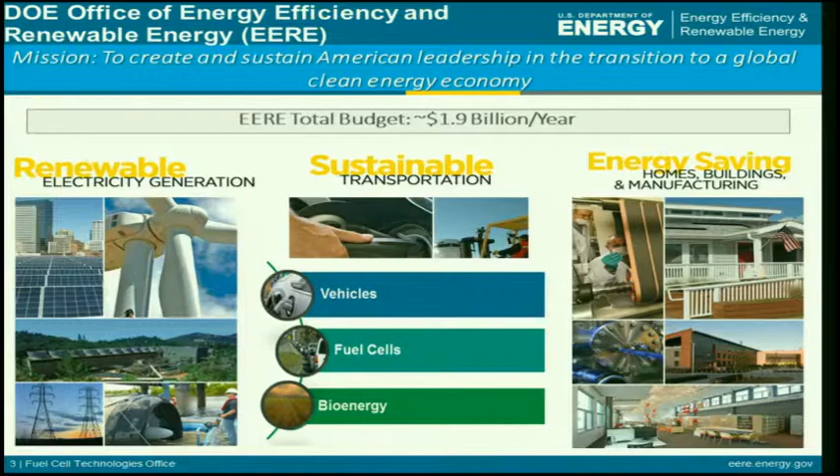And here there are three main areas: vehicle technologies, fuel cells, and biofuels. So what I'd like to do is cover the specific example of fuel cells in my area. This is an area that's actually not that well known compared to the other technologies.

I think most people are familiar with fuel cells. You can use a number of different fuels and basically convert the energy content in the fuel directly to electricity. There's no combustion, much more efficient—you don't waste a lot of that fuel as heat. Electrochemical reactions, they're modular and scalable, so they can be small enough to power your cell phone or laptop, cover transportation, and large enough to cover multi-megawatt stationary power generation. When you use hydrogen, obviously there are no emissions other than water and some electricity and heat. And as my NASA colleagues will tell you, the astronauts can actually drink the water coming from the fuel cells.

In terms of criteria pollutants, not just greenhouse gas emissions, there are benefits. One interesting statistic is that asthma rates have actually doubled in the last 30 years, so from a criteria pollutants perspective as well, electrification does make sense. And then from a resiliency or stationary power generation perspective, hydrogen can be used to enable intermittent renewables for energy storage. One other fact: in 2012 alone, climate and weather-related events cost us more than $100 billion. So grid resiliency is a key goal.

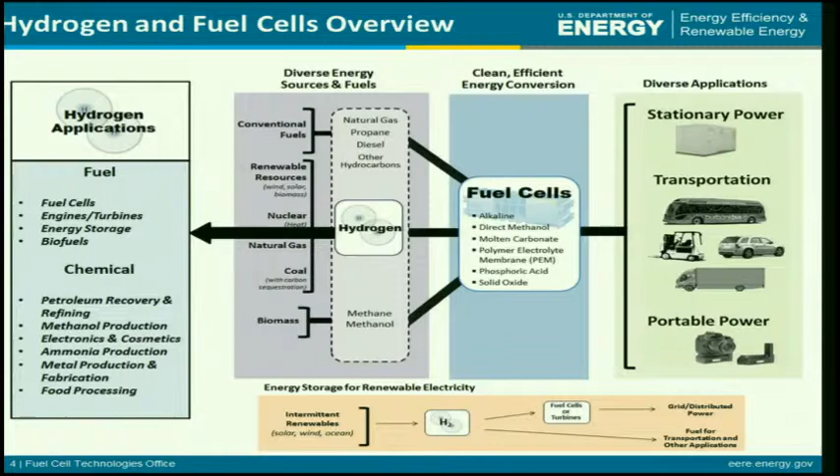And then there are a number of other applications for hydrogen—ammonia production, petroleum refining—so it's not just fuels for automotive applications. This is actually a very exciting time for fuel cells. I'd like to give you a quick snapshot.

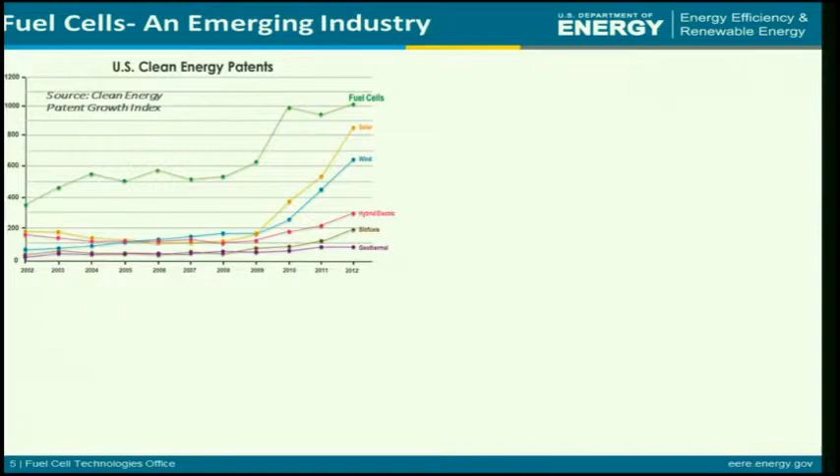How many of you have heard of the Clean Energy Patent Growth Index? You can Google it, but it tracks the number of patents issued in the US in the clean energy sector. What's very interesting and surprising for a lot of people is that fuel cells are really at the top of the list—1,000 patents granted in the US, 3 years in a row, essentially, for fuel cells. So this really represents the level of investment and the interest seen by industry in this emerging technology area. It is an exciting time.

We've seen consistent market growth, starting to get commercial—35,000 fuel cells were shipped last year. You can see steady 30% growth year over year. And the market is huge—again, many different applications: transportation, stationary, portable, well over $100 billion.

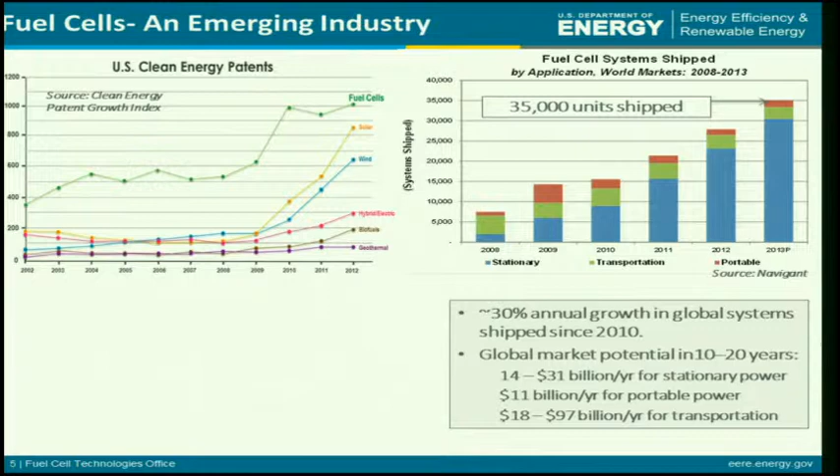And then also very exciting has been the recent announcements by car companies such as Toyota, Honda. Hyundai just started leasing their first commercial scale vehicle in California, and California has announced significant funding for hydrogen stations, roughly 50 that will be planned in the next 2 years.

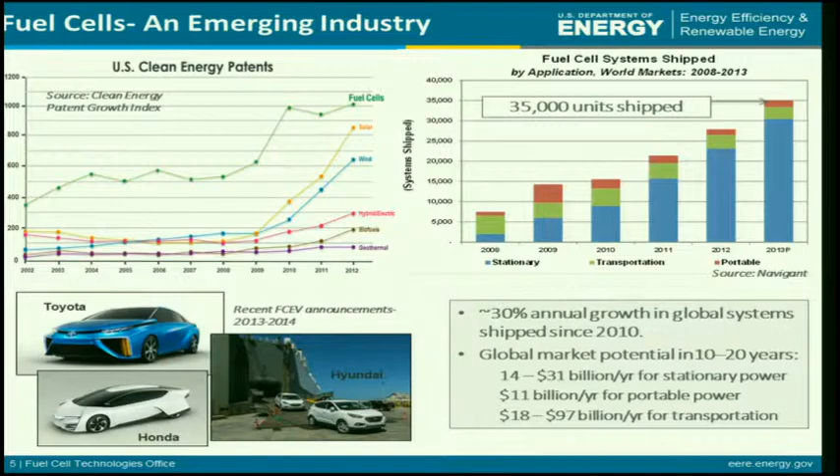So why all this interest in fuel cells and hydrogen? All of a sudden there's basically been a significant amount of progress. These are just a few examples of the progress and innovation—we've had more than 50% cost reduction in the last several years. A big driver was reducing the amount of platinum. We basically need to be at $40 a kilowatt by 2020, ultimately $30 a kilowatt for the fuel cell system to be competitive with gasoline engines. Right now, based on all the progress—still in the laboratory, but projected to high volume—we're at about $55 a kilowatt. So we need to continue to make that progress.

Just a few stats on the impact of the federal investment: over 450 patents. I think several of you as well may have been recipients of some of our awards. And it's not just about patents—there are about 40 commercial technologies in the market now that were directly traced back to DOE funding, and 65 emerging technologies that could be in the market within the next 3 to 5 years.

I thought I'd highlight one specific example, not that well known: a demonstration of the world's first tri-generation energy station. Everyone knows cogeneration or combined heat and power, but tri-generation is where you produce heat and power, in this case with a high temperature fuel cell, and you can also co-produce hydrogen from the anode. You have that extra value of heat and power for buildings, use electricity to charge your EVs, and use hydrogen on demand. This works with either natural gas or biogas. In this case, it was a wastewater treatment plant in California where we demonstrated a 300 kilowatt fuel cell and 100 kilograms per day hydrogen station.

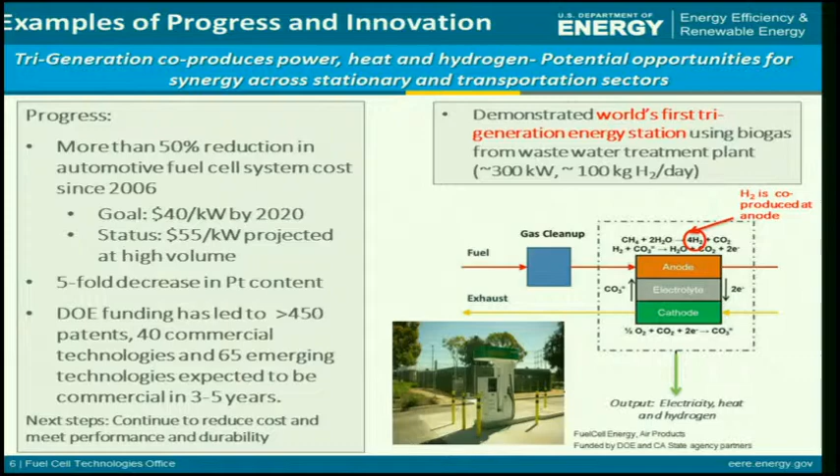Finally, the key message for the vision of the future is a portfolio of clean energy technologies for diverse applications. Whether it's on the road with EVs, PHEVs, fuel cells for various applications, we've seen early markets like forklifts and backup power for cell phone towers. We now have Sprint, AT&T, major companies like FedEx, even Coca-Cola and Wegmans using fuel cell forklifts, creating demand for hydrogen. And whether it's on the road, for ship applications as APUs at seaports, there's a lot of interest in the air for aircraft APUs.

Biofuels is a big potential play. Ground support equipment at airports - we'll be doing the world's first demonstration shortly. And even in homes, most of the 35,000 fuel cells sold were in Japan, with major companies like Panasonic and Toshiba. These are small residential fuel cells providing electricity and hot water in the home, operating on natural gas. So in the home as well.

Using renewable power, electrolyzing water to produce hydrogen, and using a fuel cell to power the home as well as hydrogen to power your cars. So finally, a portfolio of clean energy technologies for diverse applications is our vision of the future.

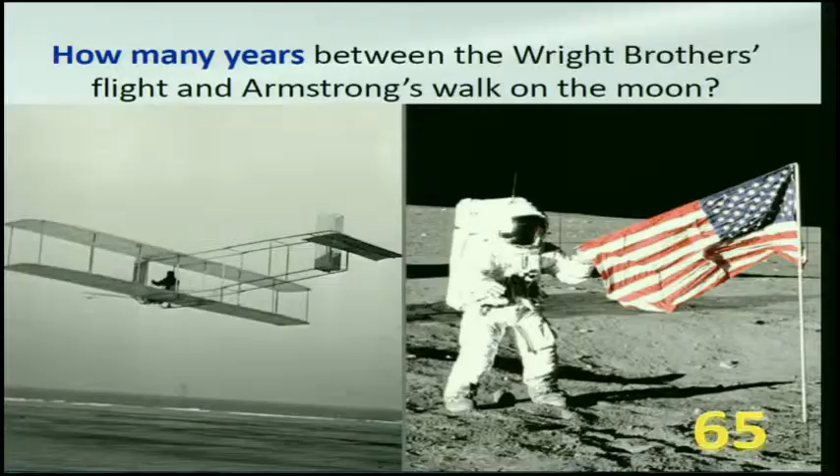So let me talk about what's happened in our industry over a similar 65-year window. It really started back in 1970 with the Clean Air Act. At that time, Congress was talking about noxious emissions - hydrocarbons, CO, and NOx. GM had the majority of vehicle sales in North America, and Ed Cole was our president. He got up in Congress in 1970 and said, okay, we'll meet the requirements for the Clean Air Act, but we need lead-free fuel, which the government mandated one year later.

We converted all of our engines to be non-lead tolerant. And then in 1974, we introduced the catalytic converter. Now, what's phenomenal is between then and today, we've taken...

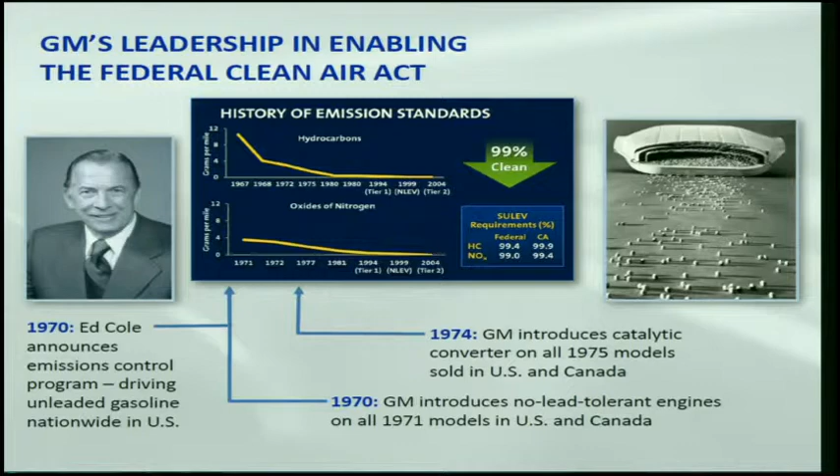99.5% of the noxious emissions out of vehicles. So this was a tremendous effort, a tremendous result, but it really is only part of where we're going in this 60-year window. So let's talk about what's happening now.

We dealt with noxious emissions, and now we're dealing with even bigger problems, and one of those is obviously CO2. If you look at what's shown here, first of all, California does have ZEV and PHEV requirements that are unique to California, but I believe will spread through other states in the US. Between 2018 and 2025 this will probably result in about 1 in 7 of the vehicles in 2025 in California either being ZEV or PHEV.

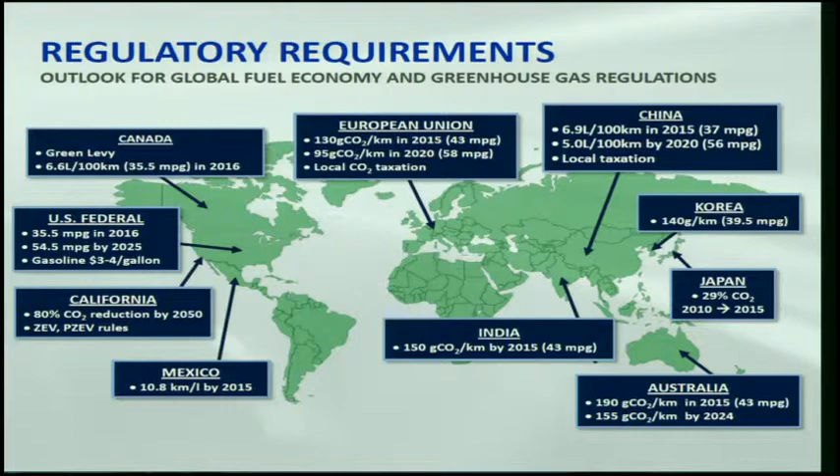And probably more importantly, by 2050, well over 80% of the vehicles in California, if you look at these regs, will be ZEV vehicles. So again, you are going to see a lot more electrification, and California really is driving that. But if you look at the rest of the world, again, very stringent requirements around CO2.

If I summarize them, we talked before about the 54.5 miles per gallon for North America. A very stringent goal to achieve, which we will achieve. But we've also got to achieve 58 miles per gallon in 2020 in Europe and 56 miles per gallon in 2020 in China. So again, we're in this time of transformation, and this is one part of that transformation, which is around CO2.

But what happened between then and now and the future? If you look at China back in 2005, the industry sold 5 million vehicles compared to 17.5 million in North America. Last year, China sold about 22 million vehicles versus about 16 million in North America. By the end of the decade, we're projecting they will sell about 30 million vehicles. So it'll give you an idea of the size of the opportunity and the size of the challenge in China.

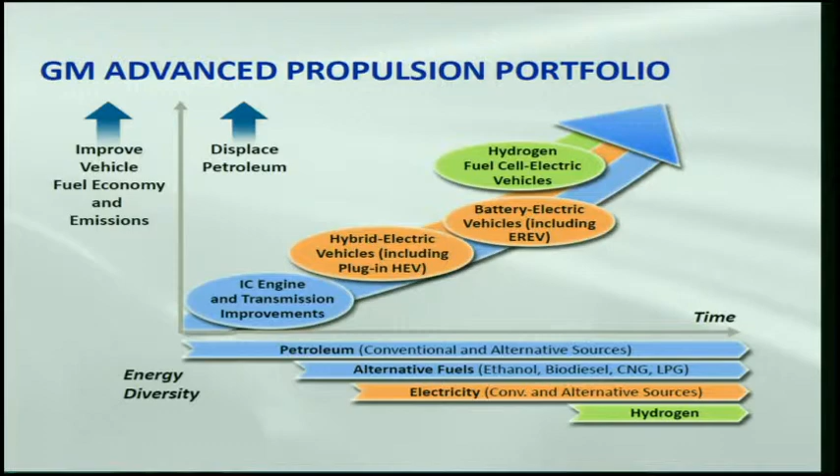It hasn't changed in quite a few years. It's about diversification. It's about the current IC engine, and how do you improve it. It's about electrification, more and more electrification, getting into ZEVs, and ultimately getting to hydrogen.

Make no mistake about it, if you go back to 1974, and if you asked the person that represented me at that time, running the labs at R&D that had just developed a catalytic converter, if you'd asked me then, well, we're going to take 99.5% of the emissions out of the vehicle, I would have said it was impossible. I would have said the utility of the vehicle would be compromised, and I would have said, sure as heck, you wouldn't be burning fuel. But we are, and we've achieved those goals.

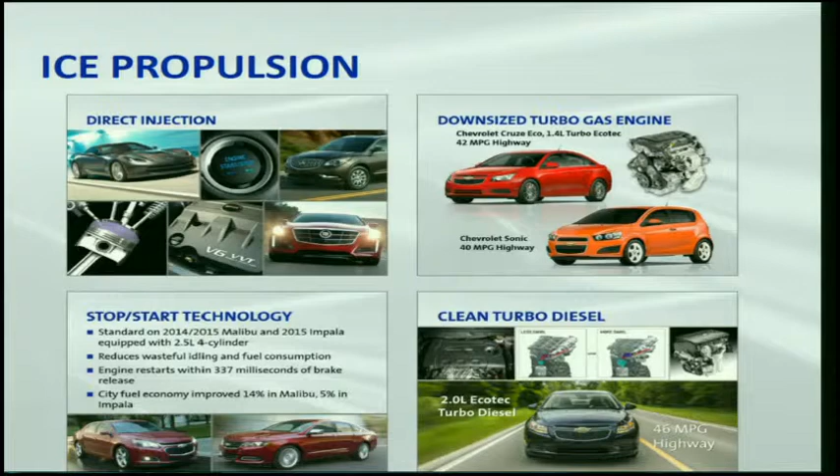And so as we look forward, again, we have very stringent requirements going forward, but make no mistake, the liquid-fueled engine is still going to be a dominant propulsion system for the future. And the reason for that is we're putting a lot of research within the universities, within the OEMs, within the national labs to dramatically improve the efficiency of those engines.

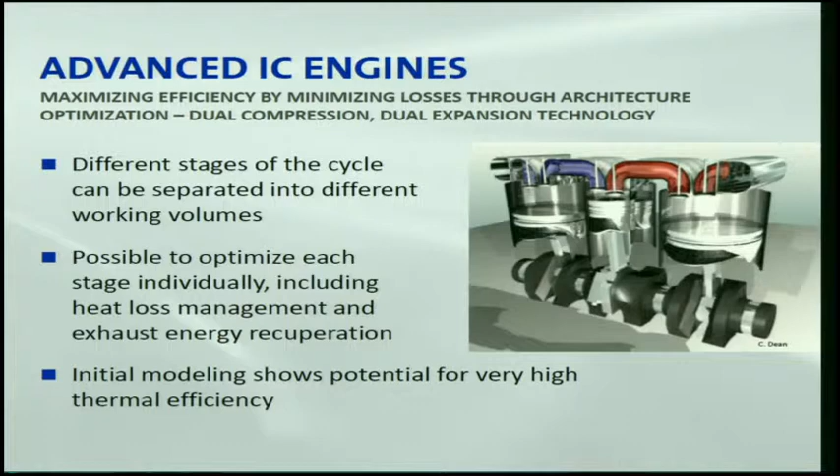And I truly believe that we'll get brake thermal efficiencies in excess of 50%. And that's going to have a significant impact in meeting those future requirements. Necessary but not sufficient. Electrification plays this very important role as well.

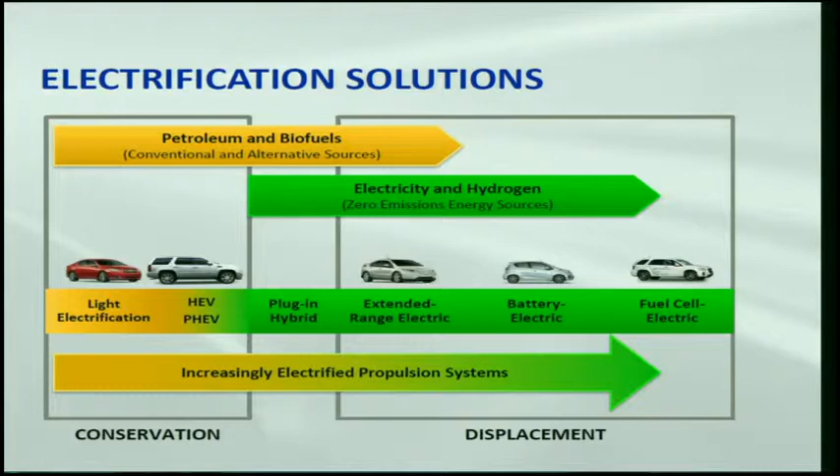Sunita talked about fuel cells. I'll not elaborate more on that unless you have questions. But electrification will play a very important role. We have a lot of technologies out there already, from mild hybrids to the EREVs, to the fuel cells, to the BEV, which you have on the left-hand side.

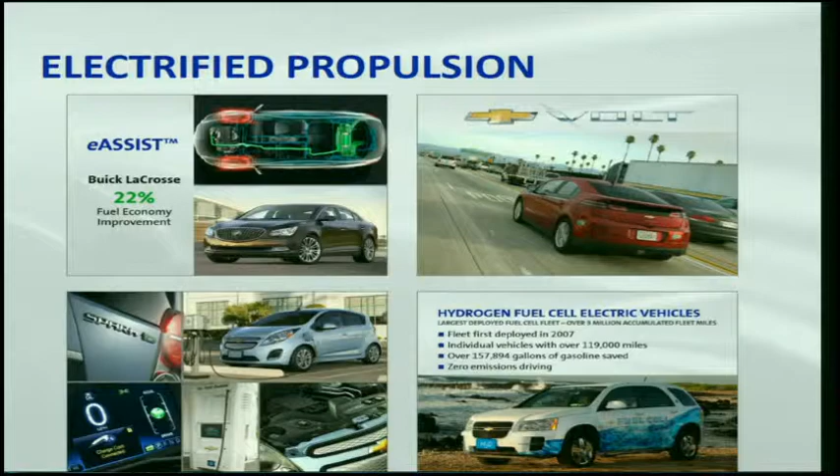One thing I would say with the Spark that I show there, it has the capability of rapid charging. So it's another step forward. I can charge this vehicle in 20 minutes with rapid charging. It has that capability. So you're seeing the capabilities evolve. But again, the game changer, if it's in conventional propulsion, I believe it's 50% and beyond brake thermal efficiency.

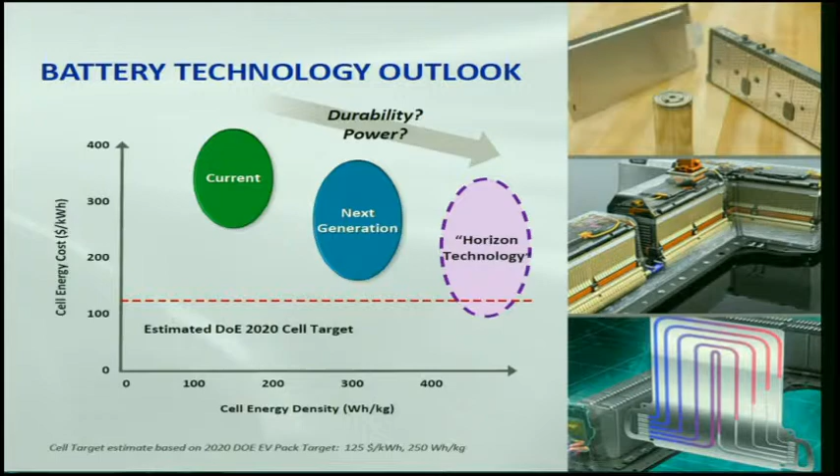The other game changer is the batteries. Today, the Volt, if we look at the energy density in the battery, it's about 140 watt-hours per kilogram. We need to keep pushing the technology, and I believe if we can get up into the mid-300s, 350, 400 watt-hours per kilogram, it will change the game for personal transportation as well. But what about other things that actually impact energy, not in a direct way, but an indirect way?

Another mega trend is active safety. You're seeing a lot more alerts on your vehicles. For some of you, you'll see more driver intervention where the vehicle will intervene. Look at the left-hand side there for the Cadillac Driver Assist package. And you'll see all of the features that you have on that Cadillac. That Cadillac today in production has 6 radars, 10 ultrasonic sensors, and 2 cameras with tremendous amount of data fusion to do all of those features.

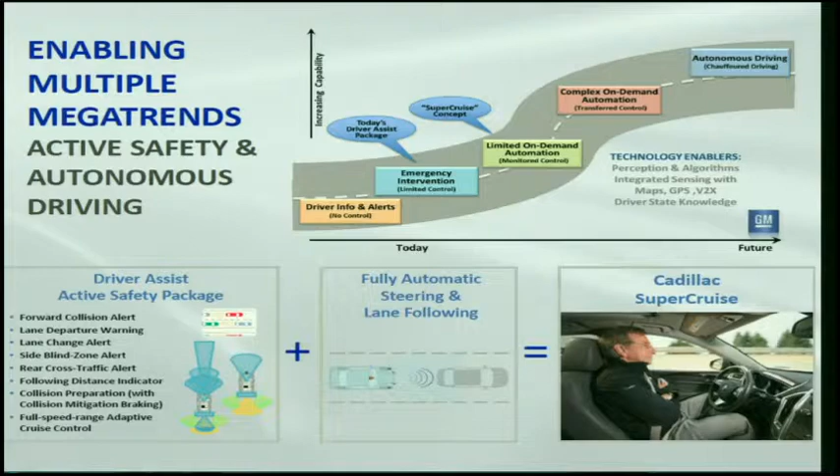We're also working on that later this decade, we're going to add additional features that are going to give us limited autonomous driving on the highway. And again, we're marching up this curve towards full autonomous operation. A lot's happening in vehicle-to-vehicle communications, vehicle-to-infrastructure, and also getting 4G into our vehicles and making our vehicles hotspots.

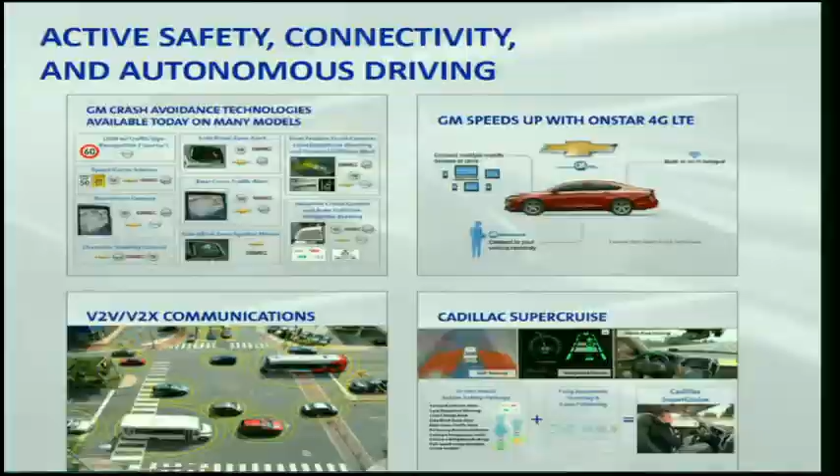So a lot of activity, and what does it all mean? It's about driving towards vehicles that don't crash. While autonomous and driverless vehicles sounds great, the real value to us will be if we can eliminate crashes. 32,000 to 34,000 people die every year because of crashes. Think if we could eliminate that. Think of the impact that has on humanity.

And then think about the impact of congestion and other things that will impact energy. The other area is urban mobility. People are moving into cities, especially in developing nations. By 2030, 2/3 of the world's population will be in urban environments, and 80% of the wealth will be in urban environments. We're seeing more and more megacities, more and more hypercities. How do we move people? How do we move people that first mile and that last mile as they live in these 10 million people cities and 20 million people cities?

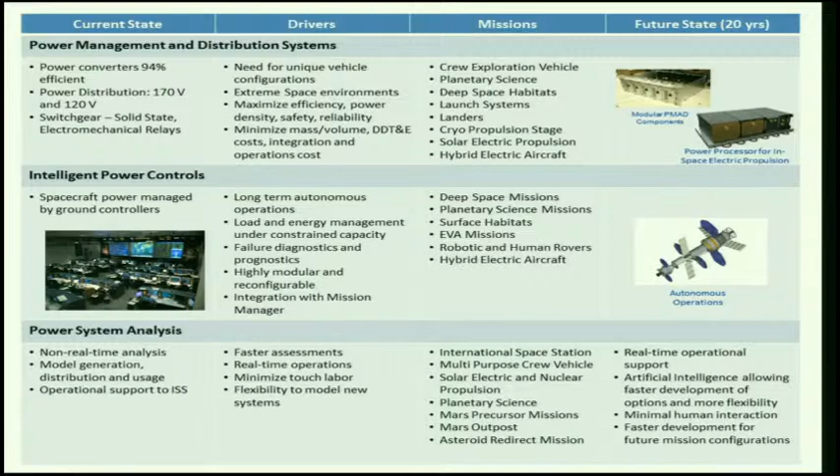The types of things we're looking at to enable deep space missions, outer planet missions, is increasing the energy density by an order of magnitude. To do that, you're going to need advanced materials—materials significantly different than the suite we're currently looking at—in order to make that a game changer. If we can do that, we can carry more payloads out to outer planet type missions, and get more supplies and other things up to support our astronaut corps for a planetary terrestrial mission, say to Mars or some other planet.

When we look at that, we're looking at it from the perspective of it being able to power a propulsion system, but also being an energy storage system for the spacecraft, and also an energy production system for a terrestrial application. So if you're on the surface of a planet, you can use that instead of carrying up the large tankage that would otherwise be required to complete those types of missions.

We've used those before, and there's going to be more work that we're already doing and will be doing to try to enable the use of nuclear power for planetary science type missions, for robotic nuclear electric propulsion type missions, and also for some of our work looking at our Mars architecture, using nuclear power as an enabler for those types of missions. Photovoltaic arrays.

There's a lot of work that's been done over the years in increasing the efficiency of photovoltaic arrays, not only for terrestrial use, but also for space use. One of the things we're working on right now, a cross-agency activity, is increasing the efficiency of photovoltaic cells because we're using photovoltaics in part of our mission architecture for solar electric propulsion. We're looking at inserting that technology into an asteroid retrieval mission, using that very efficient propulsion system to go out and capture an asteroid and then do a sample return or bring the whole asteroid back. So there's a lot of work, and again, materials is going to drive that as well.

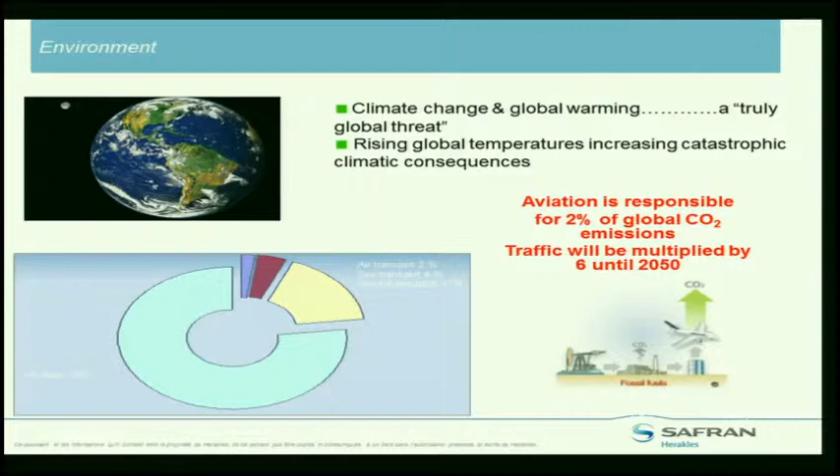As everybody knows, climate change and global warming can be a real threat for the future. So we have more and more regulations for carbon emissions. If you look at the contribution of space and aeronautics activities, it's not so big today, because it's responsible for 2% of global carbon emissions. If we look at total mobility emissions, it's roughly 25%; the other 75% is from personal use, consumption, and industry. But since aeronautics traffic, airplane traffic, is foreseen to increase very fast in the future, this emission limitation will be of great concern also for aeronautics.

These are the areas and the drivers that lead companies and research institutes in aeronautics to work hard on this subject. The first is the commitment for the reduction of net carbon emissions. The goal is by 2050 to reduce net emissions by half. And since we can envision an evolution of traffic multiplied by six, this is really a great challenge.

So this is a global objective related to climate evolution. Now, if we focus on some specific applications, airports are first concerned because they face a very high density of ground emissions, NOx and carbon monoxide, because of ground vehicles and auxiliary power units for aircraft. Another factor is noise pollution for the surrounding people.

The third item I will mention is related to business customers. Why this kind of application? Because it is high-value applications, and customers from these aircraft are particularly interested in comfort and noise. So we will see that working on the auxiliary power units for these applications is quite a promising activity.

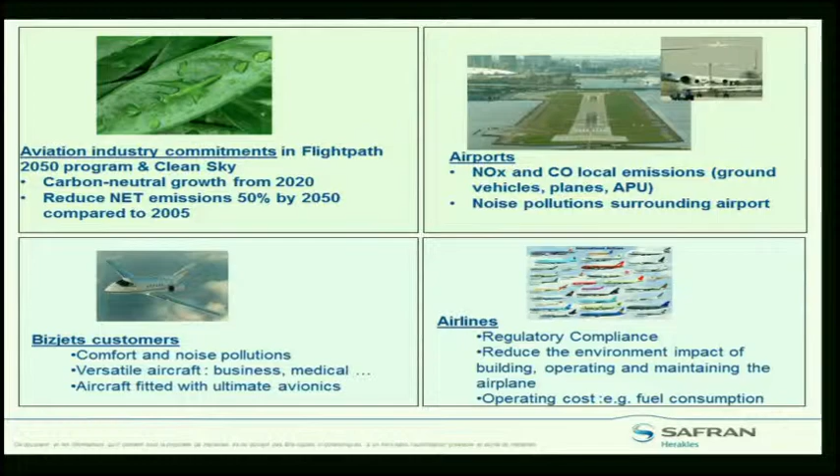If we look at airlines, they have to, of course, follow regulatory compliance, reduce the environmental impact, and also have more stringent operating cost needs.

We work in Safran Group on electrical generation for aircraft for two main reasons. The first is the general trend toward reduction of emissions, and the second is technical, due to the fact that on an airplane more and more equipment is electrical. So we have to develop electricity generation on board the aircraft.

In this kind of activity, we are involved in the whole chain for electricity production. That means fuel cells, mainly—it was discussed a lot for general application and for automotive, and it's also of main interest for aircraft, because today we can consider it a mature technology, and the mass efficiency is quite good. This is the first part.

The second part, and perhaps the most important challenge for aeronautics and other domains, is the storage of energy. We are working on hydrogen storage. The main advantage of hydrogen is twofold. First, it's clean, which is important. Second, it has great energy storage efficiency. The main problem is density—it's difficult to store, and this leads to mass efficiency issues. The main problem is mass storage efficiency of hydrogen for aeronautics applications. I will come back to that point a little later on.

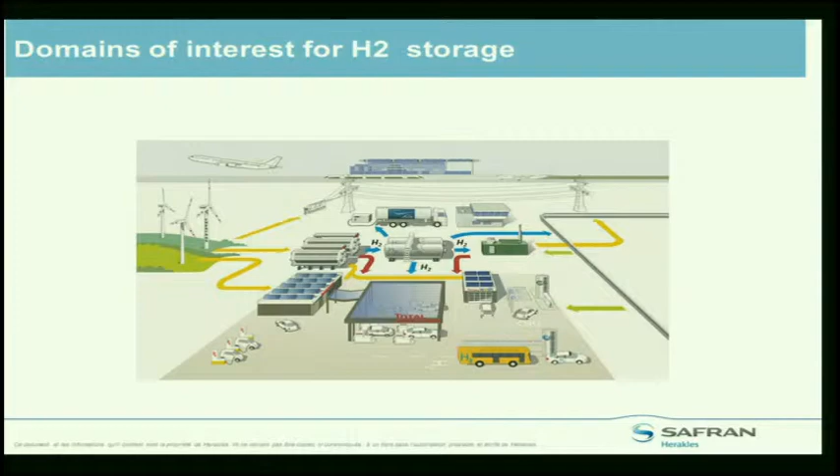Batteries are limited in total energy storage availability, and hydrogen is a good option. There's a lot of work for hydrogen storage on ground. After that we can distribute hydrogen to vehicles, so vehicles equipped with electrical engines that can either use direct electricity or hydrogen plus fuel cells, and buses, and also, of course, aircraft. So we are at a point where multiple industries are interested in these kinds of technologies, and there are works on all these areas. The solutions are not always the same, but the basics are the same.

Well, that was my last slide. Thank you.